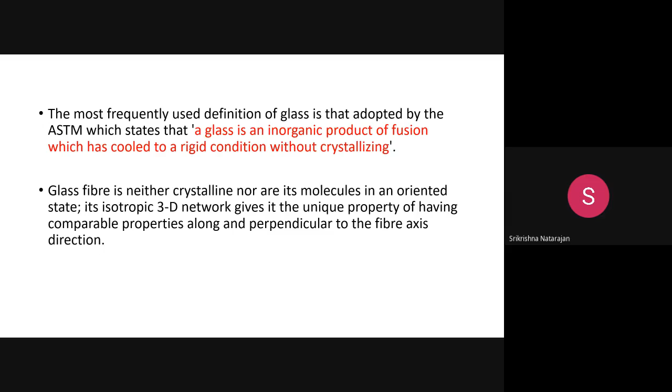So how is this glass fiber manufactured? Before going into that, we must know the glass chemistry. What is the raw material for glass? As I told you, the raw material is a mineral—silica, SiO2, silicon dioxide. This silica needs to be melted to a very high temperature, because the melting temperature of silica is very high, around 1713 degrees centigrade.

Normally, using that kind of temperature will definitely form the glass, but you will not get the required chemical properties, and there will be difficulty in processing at such high temperatures. Because of that, we need to reduce this temperature. How do we reduce it? We have to add some fillers—some impurities.

Another point to understand is that this mineral, silica, when heated to a very high temperature and rapidly cooled—what happens? The molten material will get thickened as you stir, and the molecules will not be in a proper arrangement; they won't get arranged. Because of this, we incorporate some impurities in the glass fiber manufacturing process. This is important to understand first.

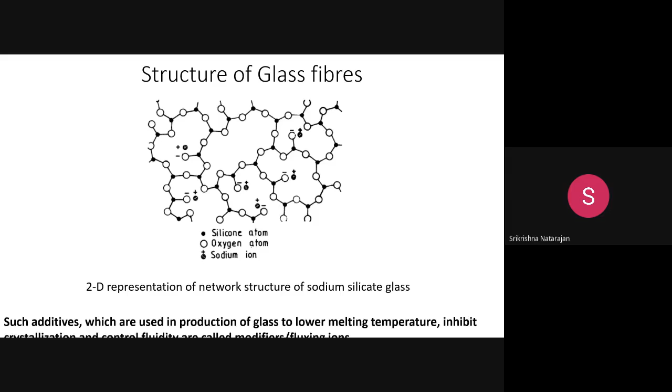There are different oxides that can be used for making glass. It is not hard and fast that only silicon dioxide works. There are other oxides too, like B2O3. You can use GeO2, which is germanium oxide, or phosphorus pentoxide, or vanadium pentoxide, or even arsenic trioxide. There are a number of oxides, even boron trioxide, B2O3. Many inorganic metal oxides can be used as a raw material, which is called the glass former. This can be used in many ways, but silica is very commonly available, so we are using it.

Apart from that, there are some other intermediates also. Normally this glass form composition is classified as glass former, intermediate, or modifier. There are a number of oxides, like aluminum trioxide, Sb2O3, PbO which is lead oxide, or zinc oxide, and antimony trioxide, and some other oxides as well. So many metal oxides can be used as raw material, but since silica is very commonly available, we are using it.

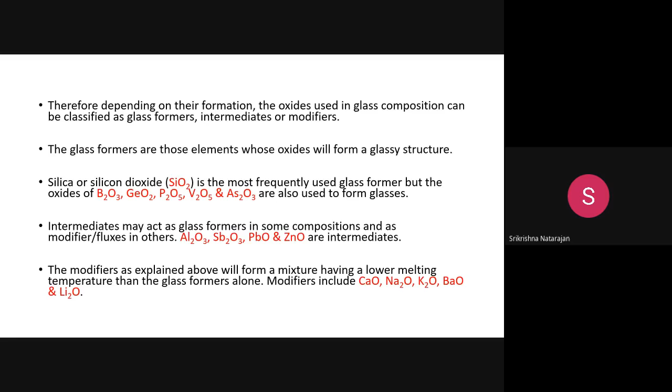There are some advantages and disadvantages of using different glass formers. For example, if you take sodium oxide and silica sand and mix them in some particular ratio, that glass may not have that kind of property. If you use calcium oxide, as we discussed previously as a modifier, calcium oxide is actually better, because it will not dissolve in water, since it improves the chemical stability. There is another glass called soda lime glass, which we will be discussing.

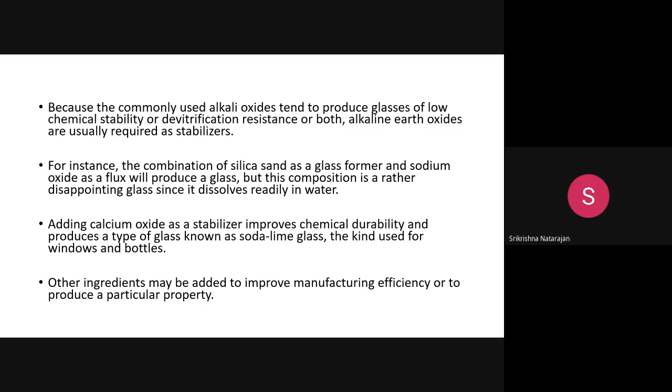There are different ways, different types of modifiers or ingredients you can add, depending on the particular property you want. Sometimes you want high electrical resistance, sometimes you want the glass to be strong, sometimes you want high chemical resistance, sometimes you want multiple properties. Depending upon that, you can modify the fluxing agent or the modifiers so that you will get the required property.

Now we will move on to discussing manufacture. I have already given you an overview of how it should be manufactured. As you observe this glass manufacture, the raw material we are going to use is an inorganic metal oxide, which is silicon dioxide. The raw material, called the glass former, is used in a furnace where a very high temperature is present.

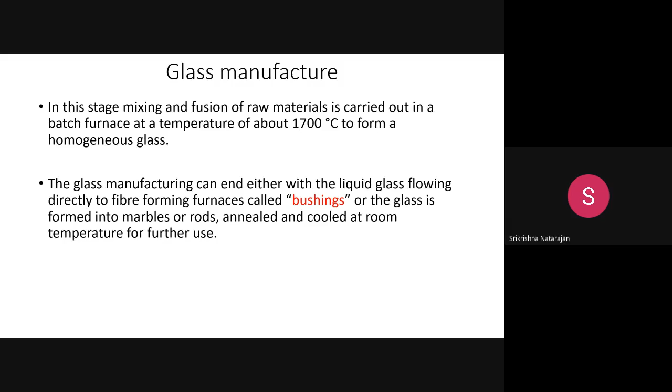First is the weighing and mixing. You need to have that glass former, whichever is the raw material. You transport them through conveyor belts in the quantity you want, and then transport it to the furnace where melting takes place, and then it moves on further through the bushings, where it will be just like an extruder.

If you just recall the melt spinning process, it will get extruded into some particular cross section where the filament formation takes place. After that you will use some size application, like a spin finish in polyester or any man-made fiber manufacture, and then you will wind it. This we will see separately.

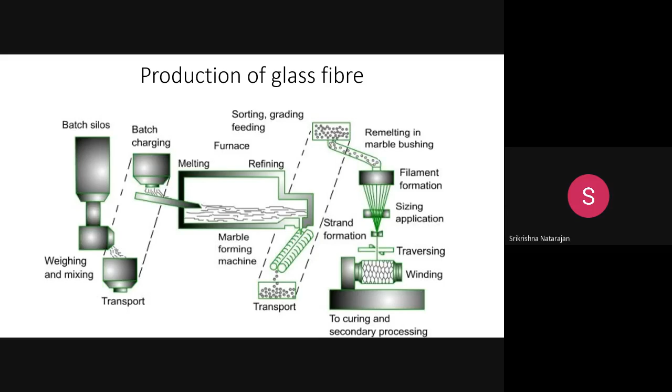The sizing application is one of the very important steps in glass fiber manufacture, and we will see later what the chemistry behind it is.

You can process it batch wise, or you can do it in a continuous method. The diagram shown here is a continuous type of method where the molten glass is spread into a series of electrically heated bushings, which has a number of several hundred holes in its base. You can see here, several hundred holes are there.

The glass will flow under hydrostatic pressure, and fine filaments of around 8 to 15 micron are drawn mechanically downwards at a high speed, say 1000 meters per minute.

You can vary process parameters like viscosity by controlling the addition of impurity, and also the hydrostatic pressure, diameter and length of the nozzle, depending on how much length or diameter of the fiber you need. You can modify these to get the control to decide what you want.

Process optimization is possible, and after that the fibers are cooled, then coated with the size, which is one of the important applications in glass manufacture. Then you assemble it into a strand and wind it to produce a cake, or you can traverse it and wind it so it can be sent for further processing.

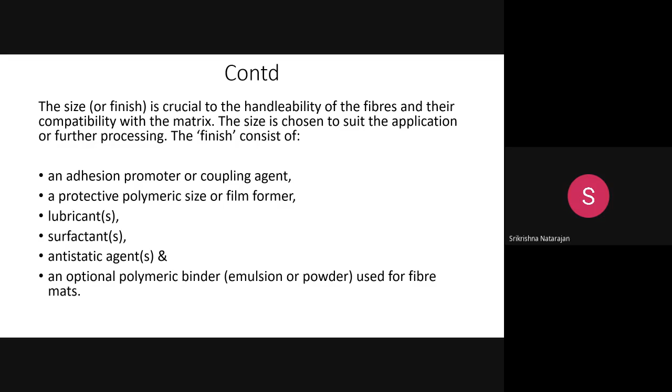If you see glass fibers, and the coupling agents used in the sizing application, there are a number of coupling agents. If you observe, these are basically resins. There are multiple coupling agents for promoting this adhesion.

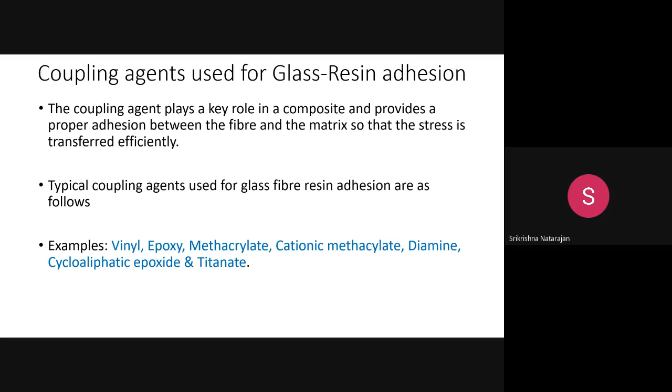They are called vinyl, epoxy, methacrylate. Many thermosetting polymers are there - epoxy and vinyl are thermoset polymers. Then acrylic polymers like methacrylate, cationic methacrylate, diamine, cycloaliphatic epoxide, titanate. There are many coupling agents that can be used so that the adhesion between glass and resin will be promoted, so that stress can be transferred very efficiently.

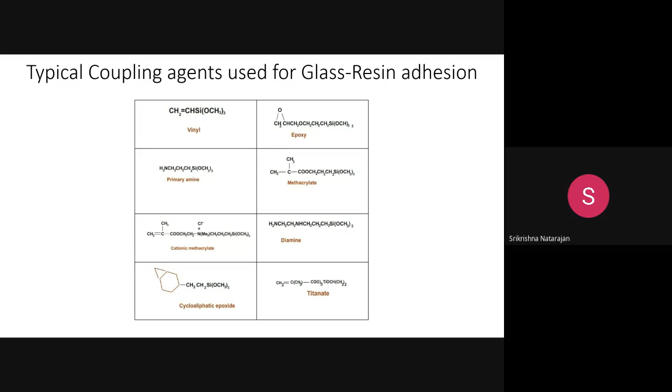You can see the different coupling agents here, with their structures - vinyl, epoxy. If you're uncomfortable with the formulas, just know these names. You should know these names, that there are different coupling agents to promote glass and resin adhesion.

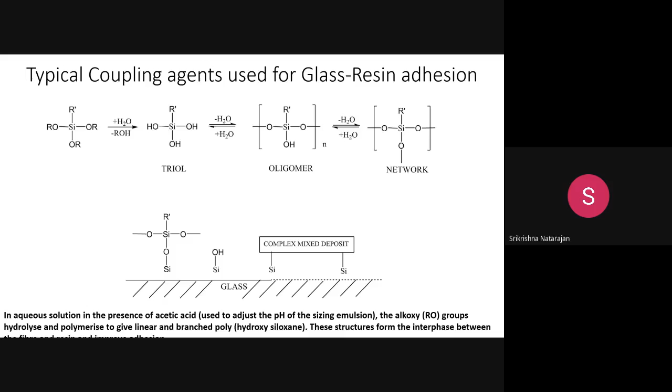So this alkoxy RO group, you can see here, this RO is an alkoxy group where it will hydrolyze and polymerize to give a linear and branched polyhydroxysiloxane. So just over these glass structures, this RO group will get hydrolyzed. You can see here this RO got hydrolyzed, so that these Si groups will get attached to the structure. This is the type of deposit where over the structure, these Si groups will be anchoring because it has got attached. Some adhesion has been facilitated. So finally it will lead to a structure which is a linear and branched polyhydroxysiloxane. This is how the coupling agent actually works.

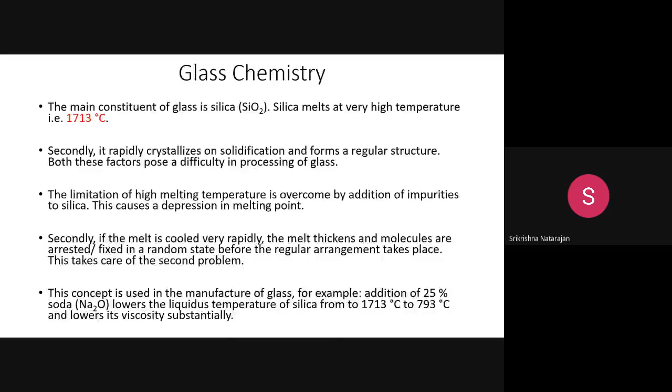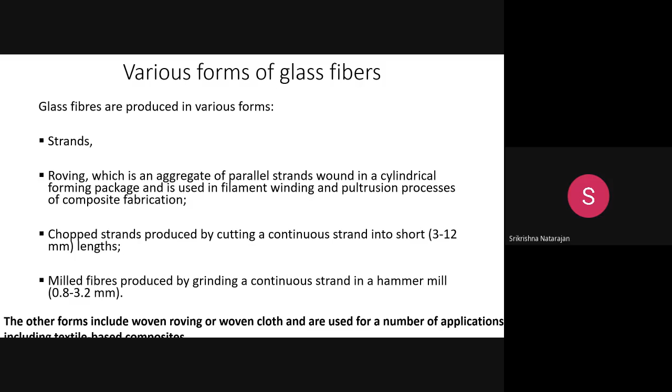These are the various forms of glass fiber in which it is sold, so that you need to understand. So next is the properties of glass fiber. As I've already told you, glass fiber is an amorphous solid.

It is an amorphous material having a micro heterogeneous structure with 3D atomic bonding without any long range order or orientation. But at the atomic level there is 3D atomic bonding, though the structure you see is a normal 2D structure.

So once you make a composite, you can actually make this 3D type of structure.

These glass fibers have a unique structure and characteristic - they are isotropic, meaning same property in all directions, where in the longitudinal or transverse direction it is the same. But the modulus and strength of glass fibers are actually lower compared with other high performance fibers, like aramid or carbon fiber - the modulus and strength may be lower, but elongation to break is very high, because if you see the stress strain curve, it will undergo some plastic deformation before breaking. It will take more stress to break, so it will elongate to some extent before it undergoes breaking.

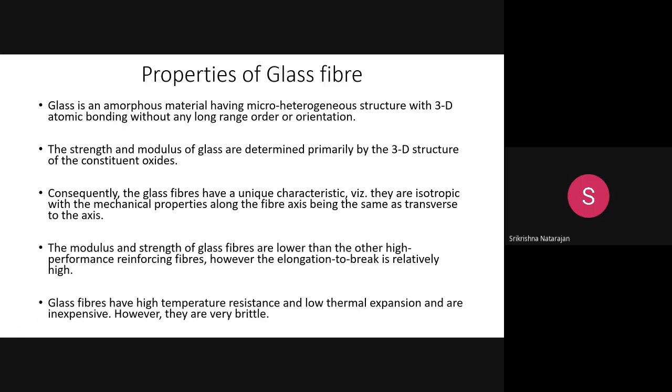Now we'll go on to some physical properties of glass. There are different types of glass, some 4 to 5 different types called C glass, E glass, AR glass, and S glass. What is C, E, AR, and S? We will see now.

C glass means it's a chemical resistant glass, so the chemical resistance of this glass will be higher. E glass is electrical resistant, meaning electrical insulation glass. AR is the very common glass, which is alkali resistant glass. And S glass is the strong glass.

From the word strong, it means it will have high tensile strength. If you see these values written here, the strength is also very high and the modulus is also very high compared with other glass fibers. And despite having high strength, these fibers also have a high elongation to break; this elongation percentage is also higher.

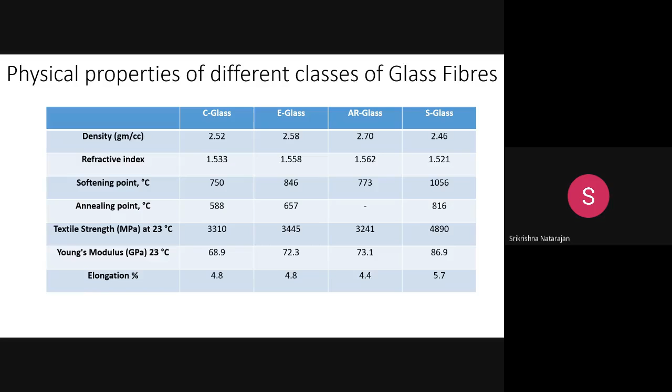So this is how you can understand different types of glass and how they differ in their properties. Now let's see the composition at the molecular level. First, the most common glass, called AR glass, which means alkali resistance. If you see the silicon dioxide percentage, which is the basic raw material, that is around 62.2 percent.

If you observe the other oxides added, aluminum trioxide is 0.74, calcium oxide is 5.2, magnesium oxide is 0.16, sodium oxide is 14.3 percent, and zirconium oxide is 16.7 percent, like that. There are multiple other oxides also present. But this is a soda lime silicate glass, or you can call it an alkali resistant glass, or a soda lime silicate glass.

C glass is a chemical resistant glass, also called calcium borosilicate glass. It is chemically stable in corrosive acids. Wherever the application requires good chemical resistance, you can use this. You can see the silicon dioxide percentage is higher in this, and the calcium is higher in this application.

Another glass is E glass, the electrical resistant glass, also called alumina calcium borosilicate glass. If you see these words, calcium borosilicate or soda lime, it means these metal oxide percentages will also be higher. In E glass, apart from silicon dioxide, aluminum trioxide is higher, calcium borosilicate is higher, and B3O3, the borosilicate, is also higher. This borosilicate is used in both C glass and E glass.

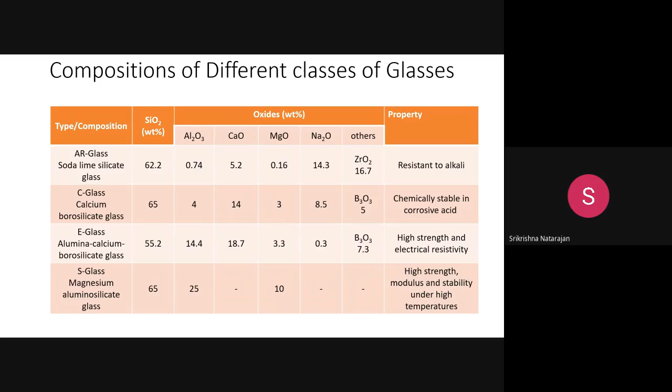So there are different glasses with different compositions. Now coming to applications of glass: AR glass is a very common glass, used in bottles and glazing where some shining is required. Those applications use this soda lime glass, or alkali resistant glass.

As already seen, wherever the application requires high strength, like in the aircraft industry, where if you're traveling in an airplane with a window, high strength is required so it cannot be easily broken.

That kind of glasses are made up of S glass. Wherever the application requires high strength, high modulus, and high elongation to break, this S glass is useful.

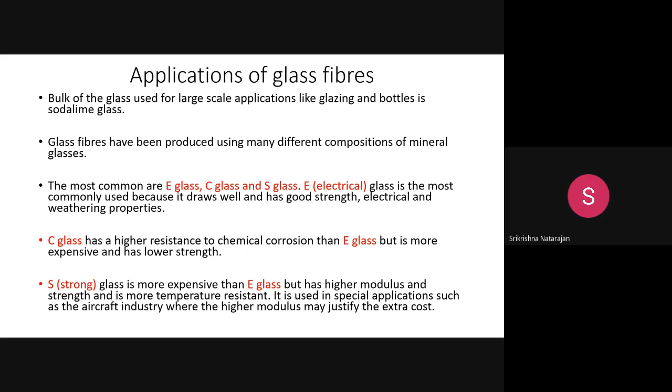Apart from that, these glass fibers have plenty of applications. This is mainly used as a reinforcement. Like carbon fibers, we do not use glass fiber alone normally. In textile applications for composites, this is used as a reinforcement, which adds strength to a material.

For example, you can take the glass fiber and a thermoplastic or thermoset polymer and mix them to make a composite, so it can be used in high-end technical applications like motor cars, rubber tires, underground petrol storage tanks from plastics, and reinforcement of plastics. Wherever plastics require good strength, you can use this.

Even in cement, you can mix it, so instead of using only cement, if you add a textile fiber, it will impart more strength and reinforcement, giving good flexural strength like a cement composite.

If you want to make other materials like sheet molding compound or dough molding compound, where you want parallel sheets, molten material sheets, or powder, the molding compound can be used. This glass fiber can be used as a reinforcing material for any kind of molding like die molding or injection molding.

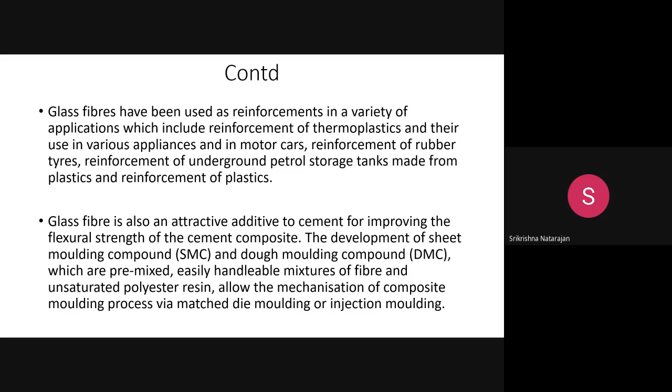There are different molding techniques where these glass fibers, after mixing with the polymer, you can make a composite. E-glass, I have already told you, is an electrical resistant glass.

E-glass does not have that high strength compared with S glass, but it has good application in composites wherever the composite requires good insulation, like electrical insulation. You can use this e-glass, but there are problems.

Its acid resistance is poor; it dissolves in dilute mineral acids. So wherever applications require very high strength and environmental or acid protection, for example for rocket motor cases to enclose the rocket motors, S glass can be used.

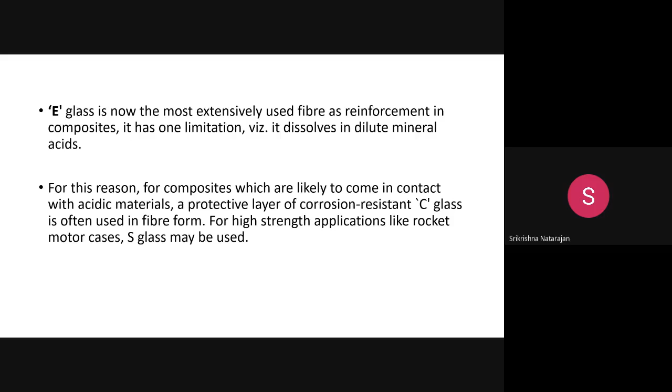There are other applications also, like acoustics. Acoustics means sound insulation. Wherever you want to construct a room where you do not want unnecessary noise disturbance, glass fibers in the form of wool can be used. Glass wool is a different form of glass that can be used for this acoustics application.

A-glass, or alkali glass, can be used for this. E-glass has good electrical resistance. Apart from that, you can use it for fire resistance also, because the melting temperature is very high. Normally, an electrical resistant, fire resistant fiber should have a high melting point, like aramid fibers which have high melting and glass transition temperature.

This glass fiber also has good flame resistance, and it can be colored using a dyeable sizing, meaning it can be colored for any application. It has good thermal resistance too; it's a fire protecting fiber. Glass is an inherently flame retardant fiber, like aramid.

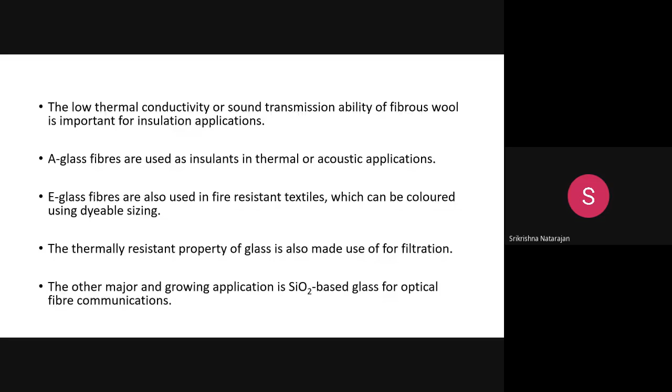With this, the discussion on glass fiber is completed. It's one of the commonly used high performance and inexpensive fibers, with very good advantages, and it is more used in the technical textile sector.